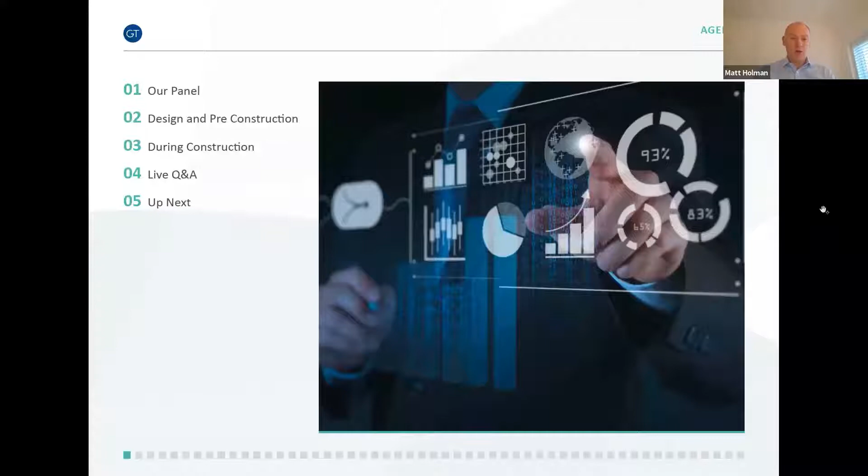So, for our panel today, we have the following. Myself, Matt Holman, a board member partner at G&T, operating in the project management division of the firm. I've been at G&T for 20 years, operating across a variety of sectors, including the office, residential, retail, leisure, sports and hospitality sectors.

Steve Bennett. Steve, I'm sure, is well known to most, if not all of you. Steve is a board member partner at G&T, leading the cost management division of the firm. I won't embarrass Steve by noting how long he's been at the firm, only to say he's longer than myself. Steve has an exceptional CV, advising an array of clients across a wide variety of sectors, which closely align with my own. In addition, Steve also offers a very strong master planning skill set to our clients. Steve is also a fellow of the RICS.

Oliver Booth. If Ollie wasn't well known to you before this Mass Timber Forum series, he should be by now, as he's an intrinsic part of the MTF team here at G&T, and indeed it's his brainchild. Ollie is a product of our graduate intake class of 2006 and is a partner of the firm, working closely with Steve in our cost management division. I think it's fair to say Ollie is recognised within the industry as an expert in mass timber and MMC, and we are very proud to offer such expertise to our clients in what we see as a growth technology in the industry. Ollie is also a proud member of the TRADA Advisory Council.

Paul Robinson. Paul is a partner working within our project management division and leads our programming and construction logistics team. Paul has a wealth of experience and has become a vital part of our service delivery across a wide variety of sectors and construction methodologies.

So I'm now going to start the first part of the session and we're going to look at design and pre-construction. So Jess, if you could start by, let's have a look at the key drivers behind this, please. So Jess, if I hand over to you. Yeah, thanks, Matt. During the design phase, there are some key drivers that have to be considered prior to making the decision to go with a mass timber solution. So why are we considering mass timber now?

It is now being considered by developers more than ever as a result of the increased focus on sustainability aspects of construction, with one of the key drivers for this being embodied carbon and carbon offset. And as we've just seen from the poll results, sustainability has come out as your top key driver. Timber solutions are the only renewable building material and can link with corporate social responsibility aspirations. For instance, non-timber solutions now incur a carbon tax, which is supported by policy, and these factors are starting to drive towards low carbon and carbon neutral solutions.

It is important to really consider what the project goals are for sustainability and how this links with the local planning strategy. This all closely links with the health and wellbeing matters, which are now at the top of the agenda. And of particular note are the beneficial aesthetics provided by exposed timber elements, which can form part of achieving positive impacts on health and wellbeing. Improvements in technology and modern methods of construction have enabled timber solutions to become a more viable option, where for many years they have only been aspirational.

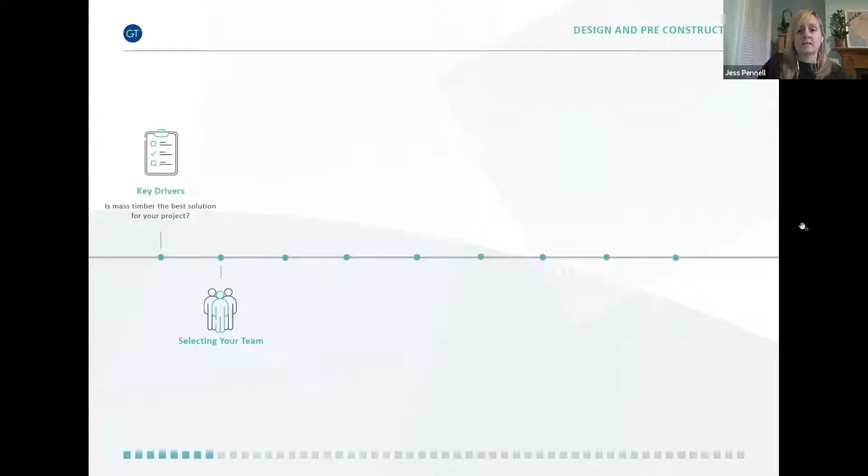If it is deemed that mass timber is the way forward, then the next step is selecting the project team. It is important to appoint a team of consultants with the right level of knowledge, competence, experience, and expertise to take forward mass timber buildings, with key early appointments to include the architect, structural engineer, fire engineer, and building control. Matt, on projects that you're working on through the team, are you finding that there's a premium to pay on consultant fees on timber projects?

Yes, Jess, there can be. Three main reasons, really. Firstly, the involvement of an expert or specialist advice can be earlier than usual in the process of a normal project, for example, a fire engineer, and therefore there's a need for a higher time input and therefore fee requirement. Secondly, there can be a need for a wider variety of specialists, including the early involvement of subcontractors and manufacturers for design services and possibly off-site testing. And lastly, as we've covered in our fire testing and building control session, it is recommended that a peer review team is procured, particularly for the justification of fire engineering and structural engineering designs. So yes, in summary, probably yes.

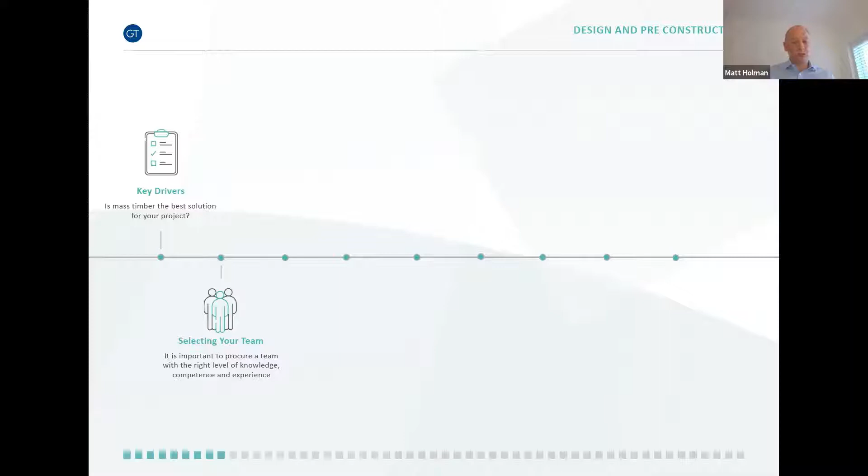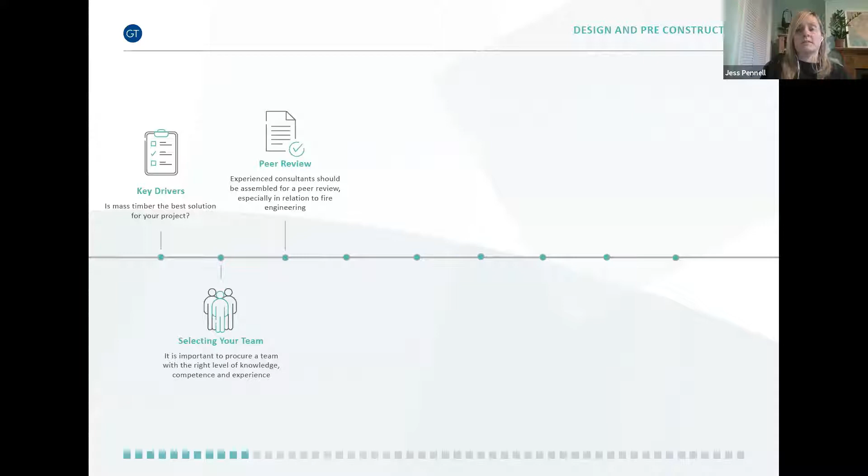Thanks, Matt. And as Matt has just mentioned, you may also need to build a team of peer reviewers to complete a peer review during the design process to validate the design, particularly in regards to fire and structural engineering. As highlighted previously in our fire testing and building control forum, it is important to appoint this team to assist with the building control process, and they suggested that this could even be an academic engineer.

As highlighted by panelists on our earlier sessions, early engagement with the local fire brigade, insurance brokers and risk assessors is highly recommended and particularly important for timber projects. We touch on consideration of many of these key stakeholders throughout this session as we continue through the steps of the project process and programme. Moving into the design process, during the design phase, the consultants will need to consider and establish the extent of mass timber use, be it a full timber structure or a hybrid of timber and steel frame with timber floor panels.

In my experience, it's necessary to undertake site surveys at the early design stages, particularly for cut and carve projects, to inform the design development and avoid problems later down the line. As highlighted in the Best Practice in Construction forum, design information and design freeze will be needed relatively early in the design process to undertake testing, engage and obtain buy-in from the key stakeholders, and for the negotiation of pre-construction

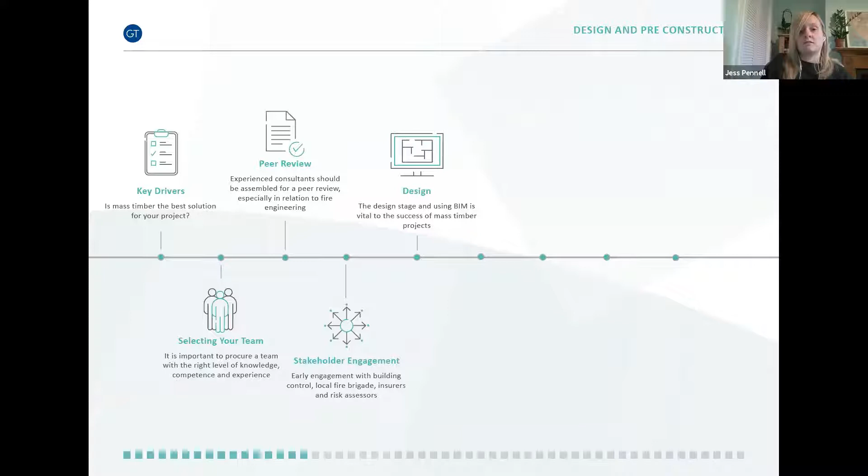It is key to consider the sizing of the floor panels to allow the main structure to be on the correct grid, which will be discussed further in our future Structures MEP and Acoustics Forum session next year. Overall, mass timber lends itself to utilising BIM for both the design coordination and to enable the design for manufacture elements. I'll now hand over to Matt for the next poll question.

Great. Thanks, Jess. Excellent. Good start. So poll question number 2, everybody. This is a quickie. So let's just get that on screen. So in your experience, is it cost that is a major barrier to using mass timber? It's a very simple one, this one. Yes or no, please. Give you a few seconds to answer that.

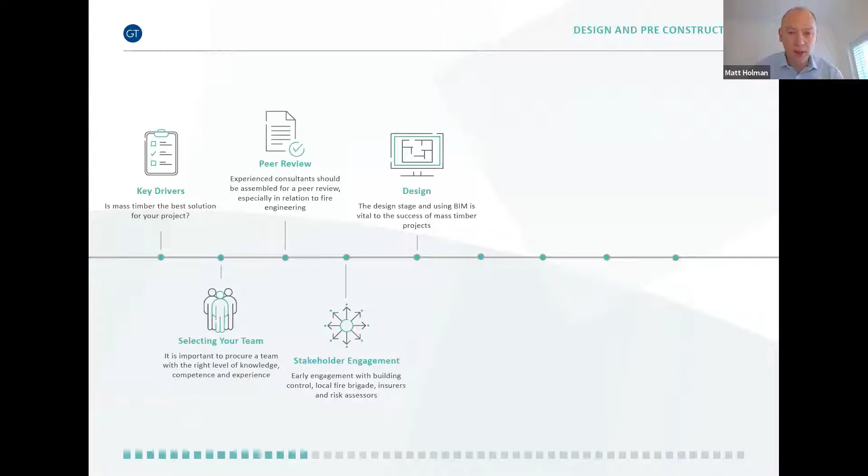Okay, the answers are coming in now. Oh, that's interesting. So it's a 50-50. Very interesting. So 50% yes, 50% no. So very interesting indeed. Thank you, everyone. So that leads into our next session, or next part of the session, to Steve Bennett on cost considerations. Steve, over to you. Thanks, Matt.

So if I look at form, and by that I mean the height, shape, grid, and position of the building, that's probably influenced by its use. That is, whether it's an office building, a school, or a residential dwelling, for example. And from there, you might think about its location. Can I easily build this building because I have a readily accessible site? Or am I in a remote location trying to build a lighthouse exposed to the elements?

So together, all of those factors help influence materiality. The form, location, and use leads us to a solution or a series of material solutions. And from there, we can look at what's most economic. There are, however, a further series of factors to think about, and Jess has mentioned them already. Aesthetics, carbon, sustainability from an environmental and health and well-being perspective. They're big considerations now. But of course, there is also just plain old choice.

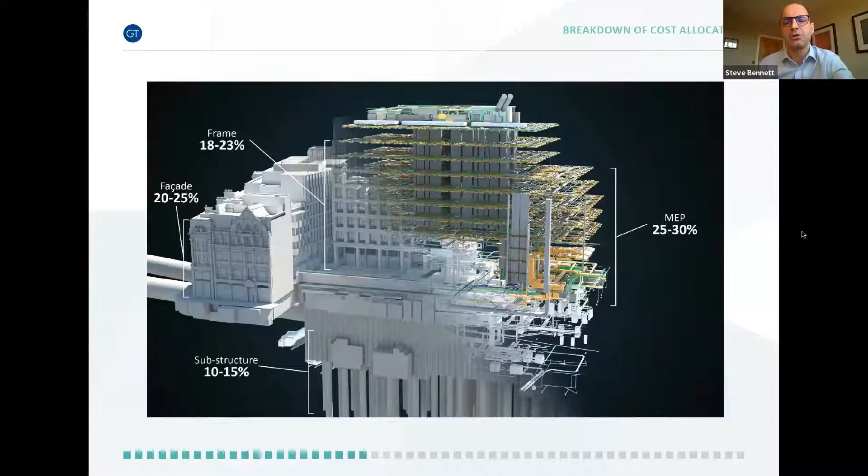So what you're really interested to understand is the cost of these various solutions. So let's have a look now at the relative cost for different framing solutions. The exercise we've looked at here is for a low-rise, regular gridded office building. Every building needs to be considered on its own merits, and many of those engineers on the call will tell us that anything is possible. It is, but at a cost.

So typically, a steel frame can be more cost efficient over longer spans than concrete. In this example, a typical 9x9 or 7.5 by 12 metre office grid, you can see that reinforced concrete might sit in the range of £300 to £325 per square metre of gross internal floor area, and a steel and hollow rib solution slightly more at £325 to £350 a square metre. Not really a huge difference in it.

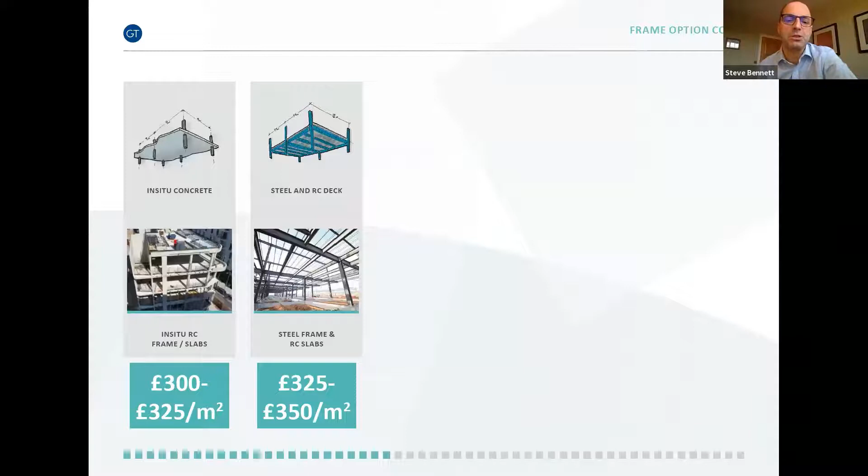There might be a small premium in steel, but that can depend on market conditions, steel prices, contractor selection, and regularity of the grid. I should add that our models here include a concrete core for all of the buildings, and the stairs are part of the cost too. If the buildings were taller, the cost would certainly be higher. Cost does change for other methods too, such as post-tension flat slabs, which are again more expensive.

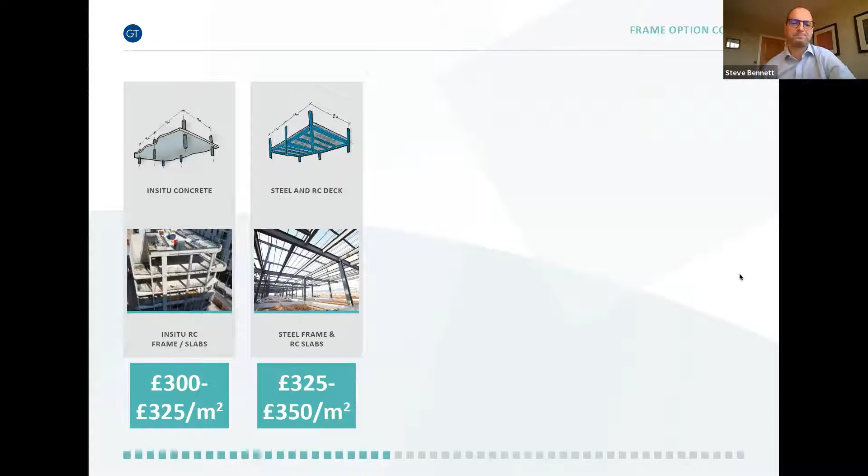So moving on to timber. You can see that by adding a timber component, the price steps up quite significantly. I should add that these costs are all supported by some live schemes that we have on site at the moment, and each system has been price checked with the market. So taking the first of the timber options, that's the centre one on your screen now, introducing CLT as the slab has a premium over a concrete and rib, potentially taking the cost of the frame up to £420 a square metre, or a 25% premium.

Moving on, glulam and CLT. Here, we've moved the frame entirely to timber, so the columns and beams, as you can see in that image there, have now become timber as well as the slab. And you can see that cost step up again, potentially up to £475 a metre, or a 50% premium on the traditional solution.

And finally there, laminated veneer lumber, or LVL. This introduces hardwood to the framing, and in this case it's a Baubuche beech, which is a higher strength and can allow for longer spans with lesser member sizes. Perhaps starting to replicate steel frame spans, it's a more durable finish and is visually often preferred. But at a cost of up to £550 per square metre, or what could be a 70% premium, it's quite a significant cost difference. Ollie's going to dip into some more detail in a moment about the various components that make up those frames.

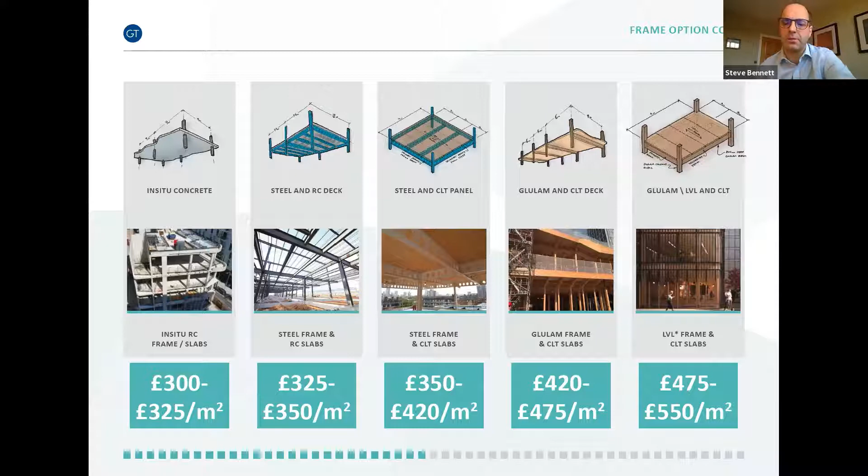If you take a decision early to consider a timber building, these options can get closer in cost to one another through potential benefits from, as I touched on before, a reduction in foundations, less interior finishes by expressing the timber where that's possible, omitting the ceilings, cutting the numbers of trades on site, all coupled with a potential to be quicker in the on-site phase. And Paul is going to cover that a little bit later. So there is the possibility that the cost differential may well get closer in overall project terms than is shown here. Of course, if the programme is quicker, you also might find benefits in finance cost.

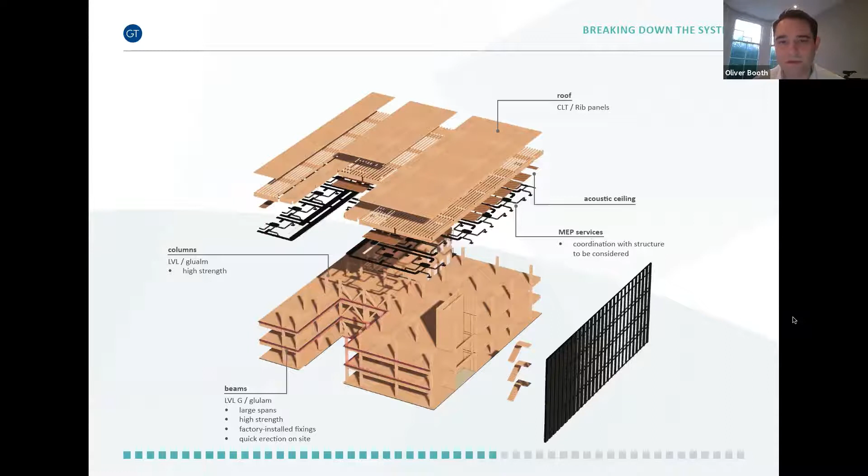Next, the frame. By this I mean the columns and the beams. Now, utilising a standard steel frame for beams and columns with a CLT floor solution should be comparable to a typical steel frame element. CLT and glulam is typically made from spruce or pine. Other species are more expensive and there is less availability. The standard and most common strength of glulam is a GL24. Others are available, but higher strength classes can increase costs, and testing the market is advised. Our LVL that our prices are based on, which is the acronym, as Steve said earlier, for laminated veneer lumber, is based on the BauBuche, which is a beech hardwood and is more expensive than softwood LVLs or glulams.

LVL is manufactured in a different way to glulam, and you can see this process on the internet if you look it up. The BauBuche Beech Hardwood LVL is particularly favoured as an all-timber frame because of its significant strength. It's a GL70 over a standard spruce glulam, typically a GL24, meaning it can span far longer distances and the dimensions and profiles are reduced compared to the glulam.

Glulam columns and beams have much larger profiles than steel equivalent, and depending on your method of measurement adopted, i.e. NRM or IPMS, can lead to a loss of net area when deducting columns or not from your NIA. The fact is that timber columns take up more floor space and timber beams reduce head heights. However, the timber columns do tend to get smaller the nearer the top of the building you get as loads reduce. So net area is improved on floor compared to lower down the building where the loads are greater.

Floor slabs. CLT floor slabs are typically approximately 200mm thick, subject to grid layouts and spans. The basic rule of thumb is greater spans than 6 to 7 meters equals thicker CLT or introducing intermediary beams and thus higher costs. CLT slabs are typically 10 to 20% more expensive than an in situ equivalent, and visual grades fireproofing costs may need to be added depending on your design.

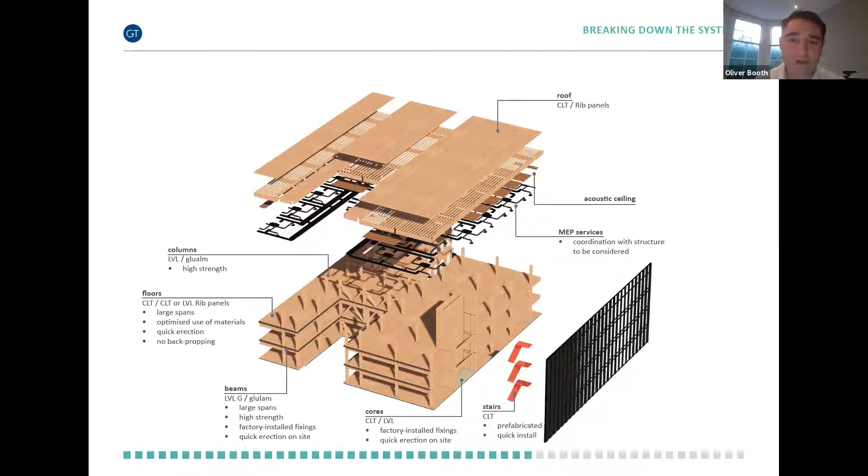And facades. The use of mass timber structure doesn't affect your choice of curtain walling within reason. However, heavier cladding systems such as a brick facade will increase loads on your structure and will therefore increase frame costs. So lighter weight curtain walling systems are more economical. We are seeing a trend at G&T towards adopting timber stick curtain walling facade systems, which are more expensive than their steel and aluminium counterparts. Notable examples where this is being adopted include Google Office and the Black and White building. These systems are more prevalent on the continent, and there are fewer subcontractors in the UK that have this experience at present.

Matt, I think we were going to do a question at this point, weren't we? Is that right? Well, we've got a number of live questions coming in, Ollie, so I'm going to choose one now. It's probably one for you and Steve, from a cost perspective, because obviously it's got some implications. This question: I've got an existing asset. Can I consider mass timber as an extension for it? So we picked that up as a cost question, I think, rather than an approvals type question. So, Steve, Ollie, do you want to just pick that one up before we go on?

Shall I go, Ollie? Yeah, so, definitely. Yes is the answer. I think that's quite common. Certainly in an office, that's a solution that we would see. Clearly that bit around foundations and of course, if you're going on top of an existing building, being able to utilize existing foundations and having a light structure, I'm sure many of the engineers on the call would see that as a good solution. I do think, though, if it's residential or a use that isn't an office building, you probably have to be far more considered and careful with that on the basis, of course, of concerns over dwellings and timber in the structure and cladding.

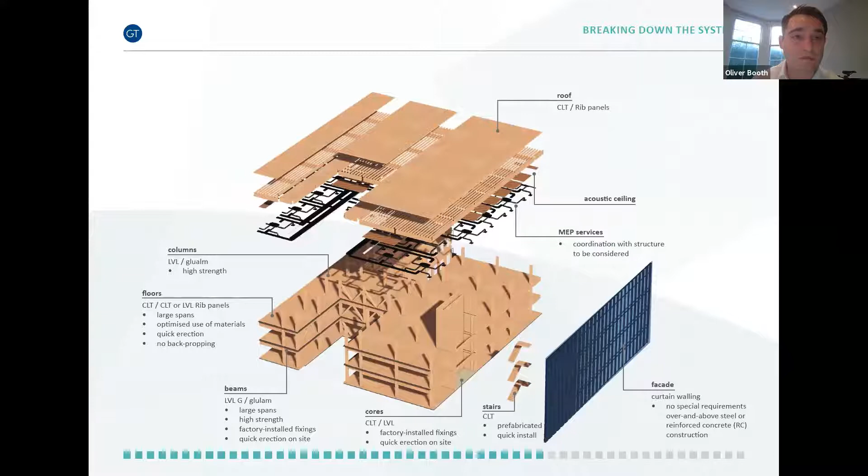And then there's the Cambridge Heath Road project out in Hackney for Ethical Property Partnership. Again, another good example of an existing building extended using mass timber. So absolutely, we might even see that surpass new build mass timber buildings in the future as we look to reuse our buildings rather than just send them all to landfill.

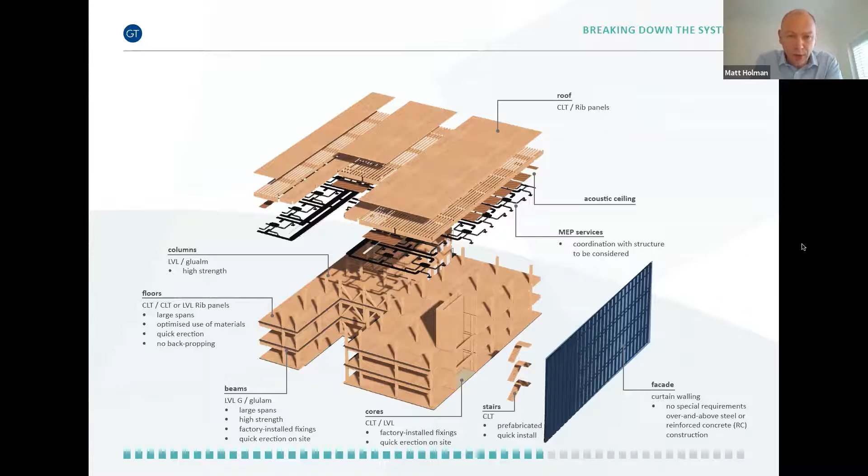Okay, I'll just pick up now some of the other key cost challenges that you might want to consider when considering a mass timber building. So in terms of fire, there's a few different things to consider. So first of all, some of our clients who still want to take the sustainable credentials are considering encapsulation. By this, I mean actually using fireboard, 60, 90 minutes to 120 minutes, depending on what your fire engineer advises, and therefore encapsulating this. And obviously this will have a cost to the actual fireboard itself.

Then if you are looking to expose your CLT, you may well need a class 0 varnish, which is an application that may be required. The cost of this tends to be about 15 to 20 pounds a square metre on the exposed surface area. It's a different trade than the actual CLT or mass timber subcontractors. It's more of a painting trade. So it is worth factoring this in. And also, I just want to highlight the importance of benchmarking samples, etc., because different products perhaps will give a different finish to the CLT. So that's worth looking into.

Then there's sprinklers and fire suppression systems. It's still advisable to factor in, even if your building is under 18 metres, as it tends to please the local fire authority and building control. And as we heard on the first session with the insurers, they also feel a lot happier about a timber building in use that's got sprinklers. I would also just throw in the mix here that it's worth considering mist systems, which are becoming more prevalent now, as they will cause less superficial damage should they go off.

In terms of potential prelims uplifts, we've already covered project insurances, whether that sits in the development appraisal or whether that sits in the cost plan, and that's always worth checking with your cost consultants. There is a premium in insurance, and we've spoken about that and understand the reasons why. However, considering cost for 24-hour security or a RoboCam setup is worth doing, because that does alleviate pressures and makes the insurers happier.

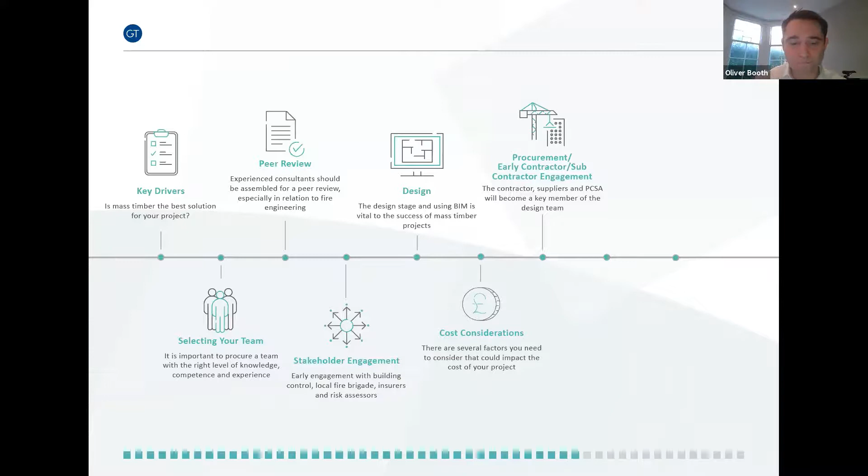Thanks, mate. Okay, so looking at the next section, the mass timber structure, we've decided that's what we're going to go with. The team are busy undertaking the design, and the mass timber contractor is now on board. This will all lead to further advantages. One of these will be the off-site testing, which can now take place early in the programme. It will de-risk both the design and the approvals process, and both site testing and mock-ups can be completed to allow any planning conditions to be discharged early in the process.

And let's be truthful, when we look at jobs that we've done in the past, the structure and cladding performance mock-up and the visual mock-up end up being the same thing because we are compressing the programme all the time. Doing it this way means that we can get this team on board and actually do the correct sequence going forward.

Great, Paul. Can I just stop you there for a second? I just want to get this question in before we leave the design and pre-construction side of the presentation. This is probably one for you and I, Jess. Can I decide to swap to a timber solution at a later stage of design of my project? Do you want to just answer that one? Yeah.

So as we always say, anything is possible, but of course you lose some of the efficiencies and benefits of engaging early with timber contractors to inform your design process. You might also need to procure new design team members with the right level of expertise and competence in timber buildings, and also, as I mentioned, a peer review team to support that. You obviously miss the opportunity of having your earlier design freeze and the ability to engage with everyone from the beginning, but it certainly isn't impossible. I don't know, Matt, if you have anything else to add.

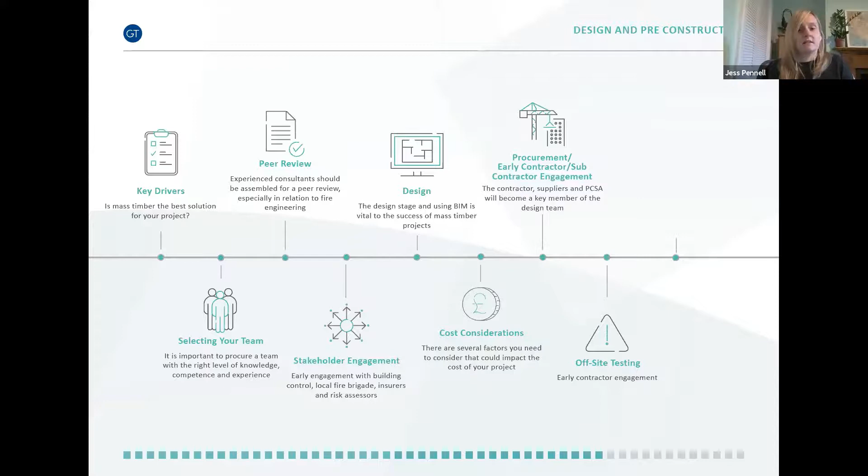I think you're right. I've just written down efficiency; grid size will be different, or likely to be different. You've picked up on taking building control along the journey with you, and the earlier you do that, the better. You've picked up on peer review processes and indeed testing. If testing is required, you may have a slight delay in your programme if you need to go back to test before you can proceed with design. So I think it's about efficiency generally, but that's great. So, Paul, back to you. Sorry, you want to carry on?

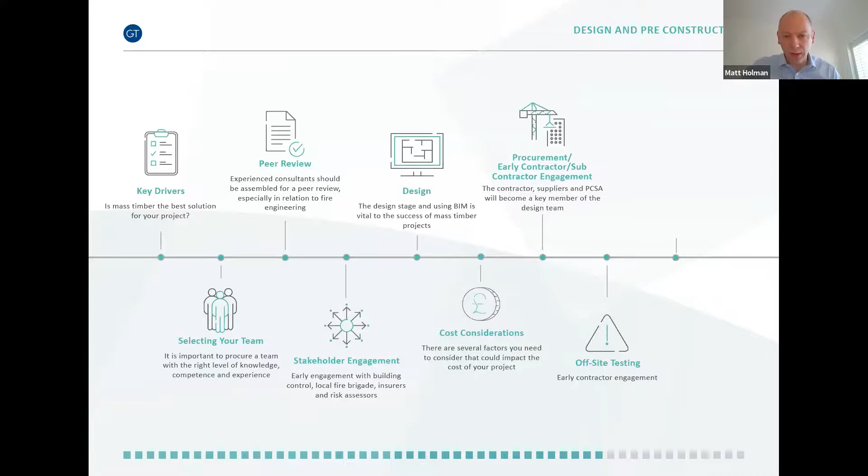Thanks, Matt. So now we look at the delivery strategy, how we're actually going to deliver this building. When we look at it, all factors of logistics have to be fed into this at this time. As with all projects, if it's not planned out correctly, then there could be some serious repercussions with the project build. The elements, we've got to consider all of them.

So some of these include the component size. As we've heard from Ollie and from Jess, the mass timber sizes tend to be bigger than others, the steel reinforcement, things like that. So early, we can establish this size and we can understand the routes and the sizes of vehicles that are going to come to site. And at this point, we can talk to the local authority, come up with the best locations, the best routes through London, through other areas of the country.

Then this will lead on to the actual on-site works. So then we've got the pit lanes. We can understand early what size these pit lanes need to be to accommodate the vehicles that we're using. And these can be put in the correct location to allow easy offloading and onto the site for erection.

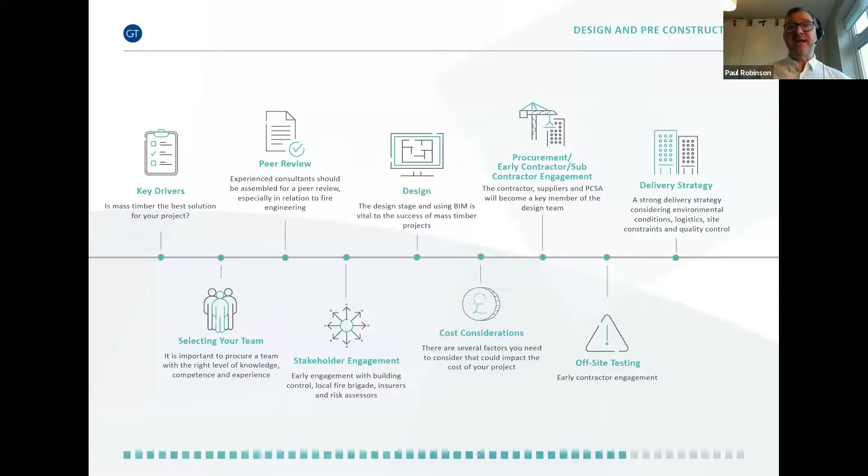We'll need to look at finalising the laydown areas. So as we've previously mentioned, the timber tends to be bigger. And if we can't fit it on a really large wagon, they need to come in component size. So therefore, we may need a laydown area so we can actually form these on the ground. Large components unfortunately won't fit on these wagons. So we will need that laydown area. It needs to be somewhere local to the site, somewhere easy for the work face so we can lift it straight on once it's been formed. And then you've got the crane strategy.

With all large structures, the lifting strategy is key to the frame. The piece count and the programme for the structure needs to be understood as early as possible, whether the project requires 1 or 2 hooks to hit the target programme. The location of the cranes, we need to keep them outside the building footprint to ensure water tightness to the best of our ability during construction. All these need to be considered.

Options for on-floor cranes to install the CLT floor panels and on-floor manipulators to install the cladding to release the main hook for the structure. All of this needs to be considered early in the project. So once we've got the main logistics sorted, we then need to understand when and how the building is going to be erected. So is there a requirement of temporary works to allow the structure to be erected? Any temporary propping that's needed to ensure the integrity of the new structure during erection? This can all be finalised really early in the process with everybody on board.

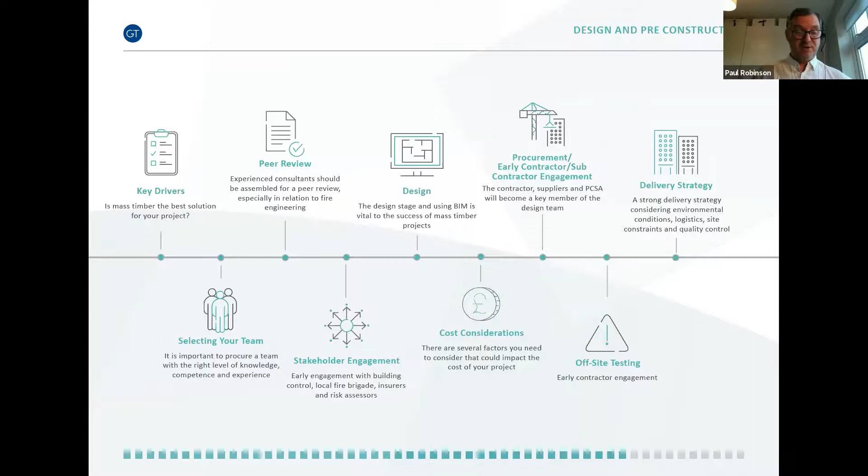And then I think, Matt, at this point we're on to the construction. So I think we've got a poll question now. Yeah, I want to do the last poll question now, Paul. So thank you for that. So let's get that up on the screen if we can.

Okay, so off-site testing can be expensive. Would you consider collaborating with other developers on a bespoke testing program for these materials? Again, a simple yes or no. Shouldn't take long to answer, but obviously this is aimed more towards our client base and our developer team. But if you'd like to answer that, that'd be helpful.

And the answers have come in, and we have a definite yes, fantastic. So yes at 95% and no at 5%, and that relates back to some of our previous panels actually, whereby there's a big need for collaboration. That's great, thank you for that.

Right, so moving on. So during construction, we've got a piece now on construction, and back over to Paul to take us through these pieces. Thank you. Thanks, Matt. So now we've looked at the pre-construction elements. Hopefully this programme is starting to fit all together seamlessly. However, there are considerations we need to do for putting the construction programme together and understand really if mass timber is still the correct solution.

So there'll need to be some parameters for this programme. However, to do this, we need to have a few considerations. So what will the critical path be? When looking at the various buildings, they will need to understand where this critical path will run through the construction sequence. For a low-level building, this path may be running through the first 6 floors of superstructure, allowing the cladding to commence, then into fit-out and commissioning and testing. For a high-rise, this critical path alters and goes through the installation of the roof plant, and therefore the structure becomes the key activity, meaning the quicker the structure can be erected, the shorter the programme.